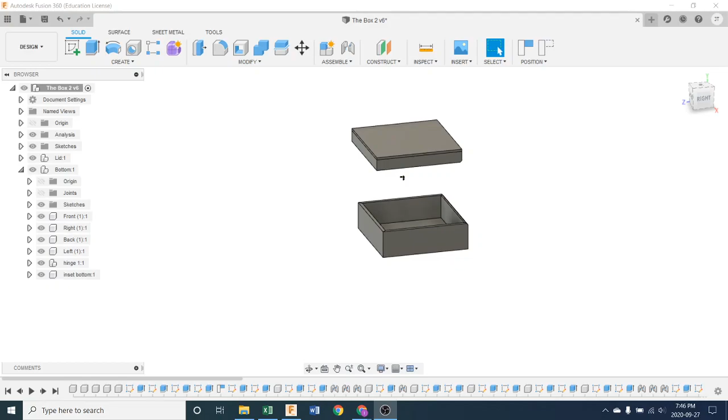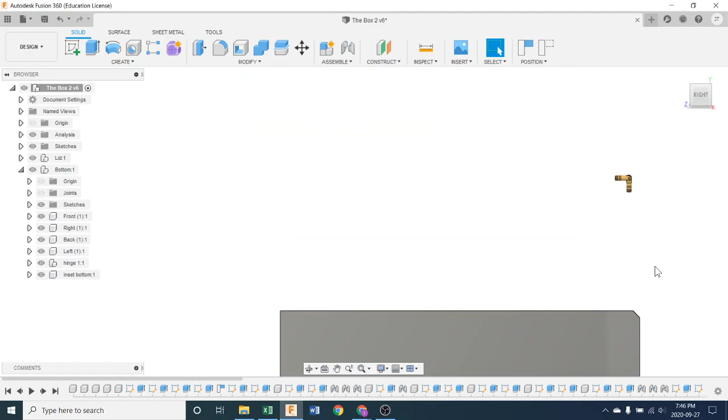So if you followed along so far, you will have brought a hinge in, and we had that on the class. It was already modeled for you and you could just bring it in. It was on the H drive, the shared drive. So just one thing before we start, I'll grab this hinge and bring it over here so we can see it. My hinge is kind of facing in the right direction for what I want.

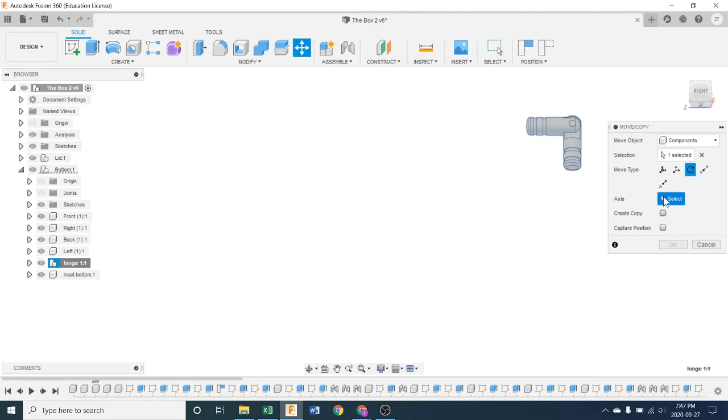If yours was somehow brought in a little differently, you can head over to here where you brought the hinge in and right click on the hinge, then you can move the hinge and select rotate, and pick the axis of rotation, which is what I'm picking now, at the center down here. Then you should be able to grab this little handle and move it around. I'm just going to escape out of that because I don't need to. Mine's kind of pointing the right way. So you can move it that way, probably in 90-degree increments to get it right. I'm sure it's close, but anyway, here we go.

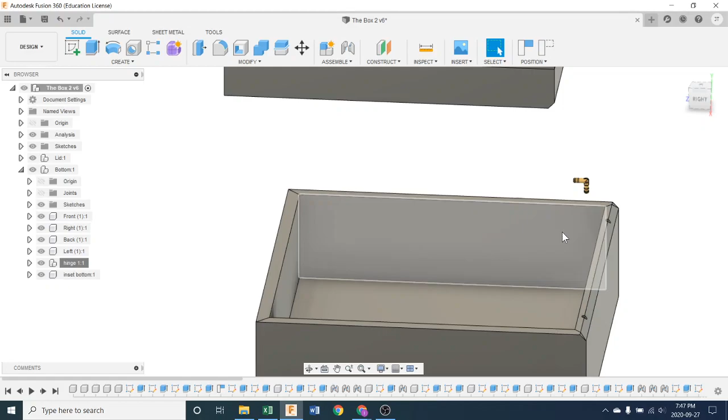So I got my hinge, and I'm going to put it in the hole. So we know how to do that, right? We know how to assemble things. So we're going to assemble a rigid joint. So a joint. Sure, why not. And that joint is going to be the first.

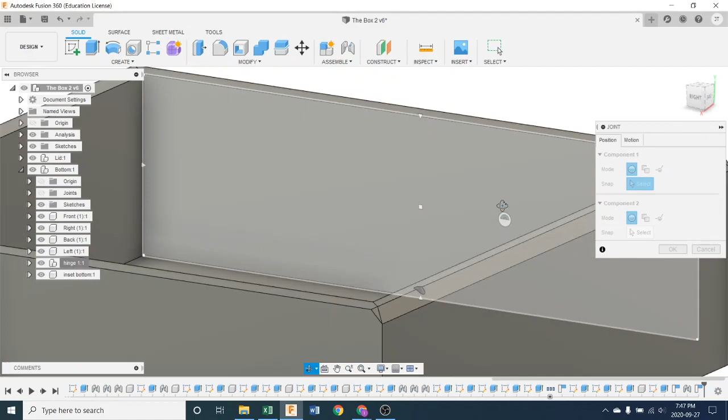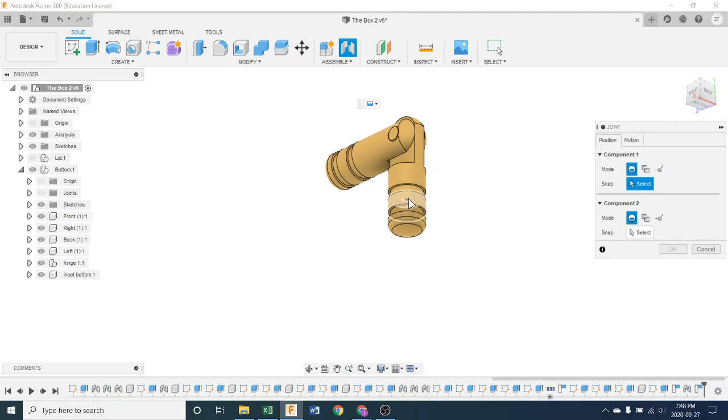I want to move the hinge to the box, so I'm going to go grab the bottom of the hinge. Now, if for some reason things were in your way when you're trying to do this, don't forget you can just switch them off like that. And so that's out of my way, and I just go in here. As I'm picking, notice I've got several centers I can pick from. See that target in the middle? I don't want anything other than the lowest one, so we'll be very careful. We'll pick that. So I got my first pick, and if I got it wrong, I could just X and try again. So there's my first pick.

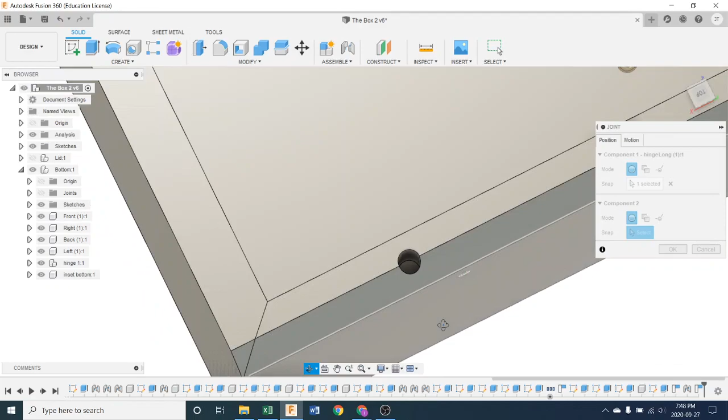I think I got it right. And now, get my box oriented right. I am going to put it way down in the bottom of the hole, which is like this. Click. Now notice it only moved half of the hinge. It does that to save computer power. It's unnecessary math to move the whole thing. So they just move part of it, and the other part will catch up once I accept this.

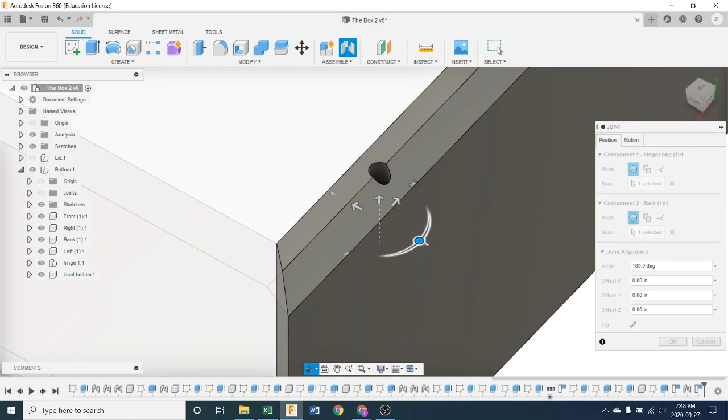Now notice my hinge is pretty far down in there. I must have drilled my hole a little too deep. So what we're going to do is bring this up using the Z axis here. Offset Z, see it's offsetting now, 0.2 inches. We're going to bring it up a little bit just till it sticks out, because what we want, I'll look at the right view, is imagine the other part of the hinge is in here. It's going to be in the middle of the lid, and it needs to be high enough up so that the middle of the lid can clear the bottom part of your box here.

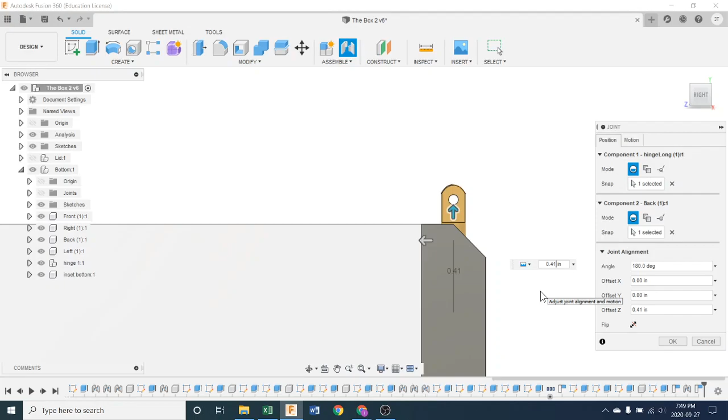So I think it needs to go up even a bit more, but maybe finer now. I'll key it in. Let's go .41. We'll try that and see how it goes. We'll push OK. I can always go back and edit this, so I'm going to push OK for now. There's my hinge, and hopefully the distance from there to there is at least 3/16 of an inch so that they don't collide with each other when we put them together.

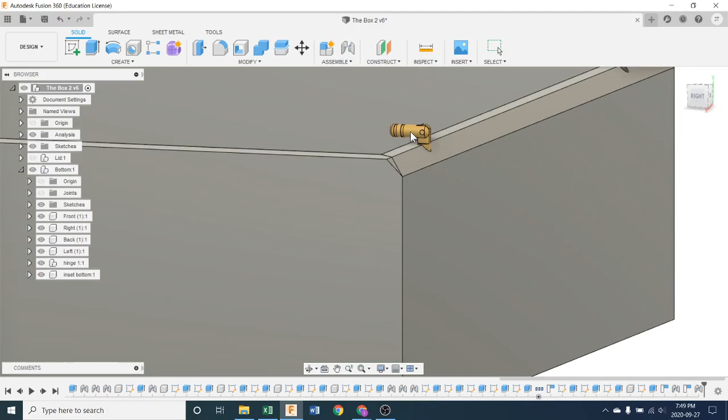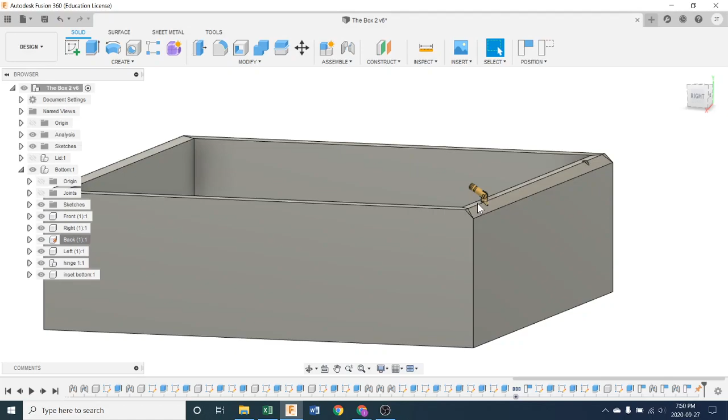Okay, next part. This hinge right now is joined, and if I grab it, I'm just moving the whole box around. It would be nice if it operated the way it's supposed to. Well, the way to get that to happen is the back here, the back of my box. I'm going to right click on it, and I am going to ground that, and capture position, sure. Now this part here doesn't move anymore. I can click and hold, but it's grounded. It's like stuck to earth, so it doesn't move. But now the hinge, since this part of the hinge is grounded and doesn't move, this part can start to rotate. And that's pretty cool to be able to do that.

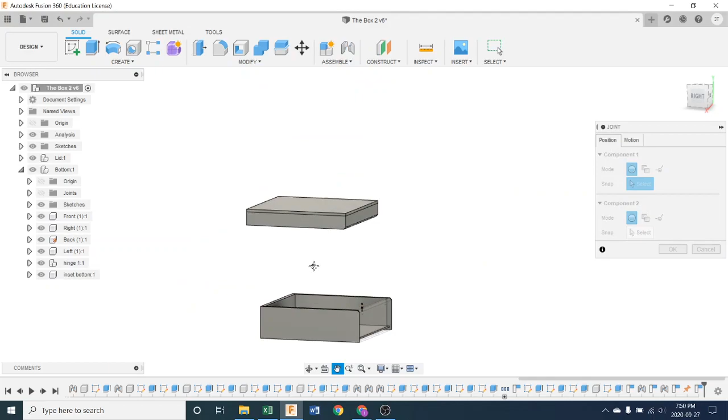So I'm going to put it all the way up just to make it easy on myself for the next move. Okay, next move. We are going to assemble a joint, and bring capture position, and we're going to turn the lid on, and we are going to go find that lid and the appropriate hole, and we're going to pick that as our first.

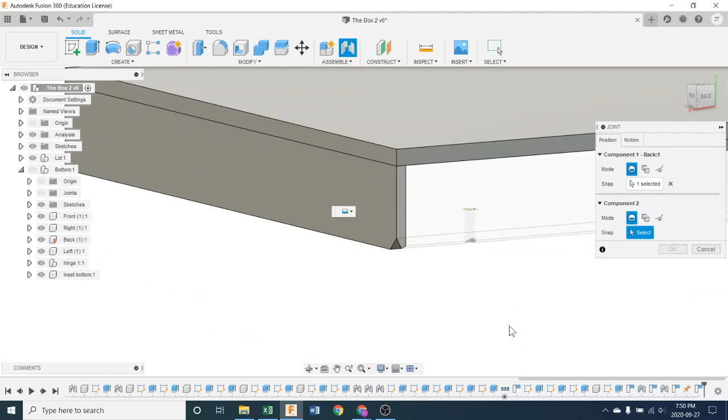Now see the bottom coming up? If the bottom's in your way, don't forget you can switch it off for the moment, go in and find what you need for that. So I got my first one. So now what I have to do is turn the bottom back on, because that contains my hinge.

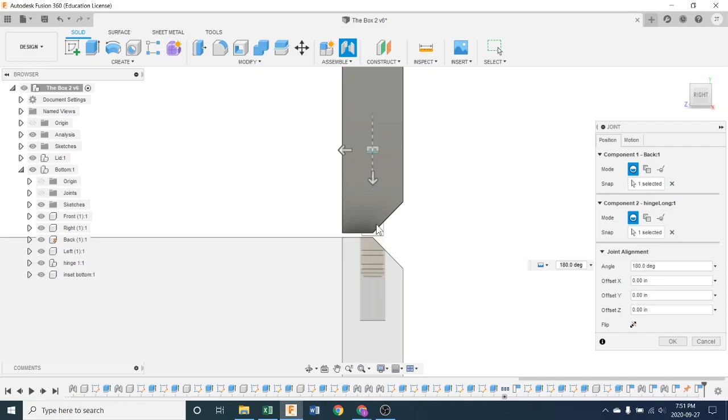Now we'll zoom in and find the top edge of the hinge. There we go, and they're going to come together. Remember, the whole thing's not coming together, just part of it to show me, see if I like it. I'm going to look at it from the right, and zoom in. And look, I do have, just the way it is now, this little gap that I think for now is pretty good.

This will be enough gap to allow the hinge to operate, so I'm going to push OK. And now let's see if it works. Oop. And now the hinge doesn't quite work. So we have to go figure out, oh wait a minute, it does work, but it's not quite right. And that's because when I modeled the hinge, I just chose like 90 degrees of movement, and apparently that's this 90 degrees.

So now we have to fix that. So I'm going to go into my hinge where I found it. Notice I'm only working with one right now. If you have two, in a moment I'm going to ask you to delete the other one, and we're going to copy this one. But anyway, we have just one.

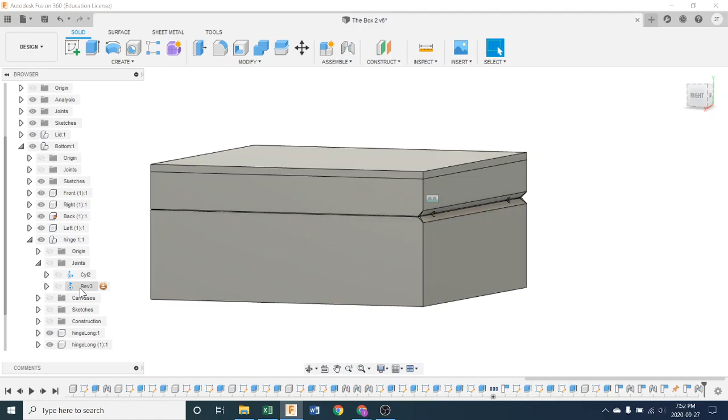I'm going to go into it here, expand it. There we go. And I'm going to look down here for joints. There we go, expand that. And this one's the revolution or revolute joint. I'm going to double click that.

And now if I look at it in right view, I can see that I have a flag vertical and I have a flag here. And that's kind of representing the motion that I have right now. Well, if I move those flags around in relation to each other, it looks kind of funny right now. But if I do this...

And I push animate, see the hinge does not do quite what I want. So let's go back and do it this way. Hit stop the animation. Let's go this way. And let's go like that.

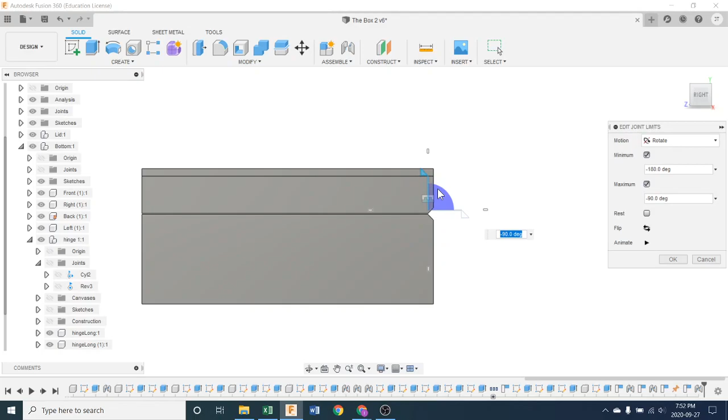So we're looking for 90 degrees. Push OK. See what we got now? Oh, that's not good at all, is it? Okay, one more try. And we're going to put this right back to here.

And we're going to bring this one back down to here. And I think it was, if I recall, I wanted this to be at 0 and this to be at 90. There we go, let's try that.

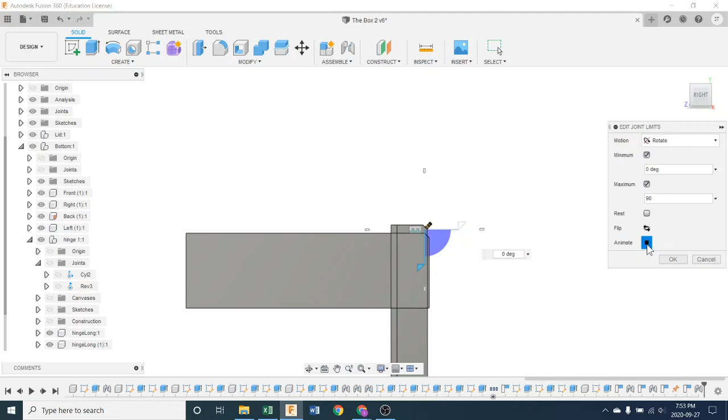Okay, when I do that, aha, I got it. Now that's what I mean about this tutorial being a little tricky. There's a few moves in here that can be very frustrating, especially since you guys didn't build the hinge yourself from scratch in your drawings. You're kind of bringing one in, so you have to adjust that revolution there. But give it a try.

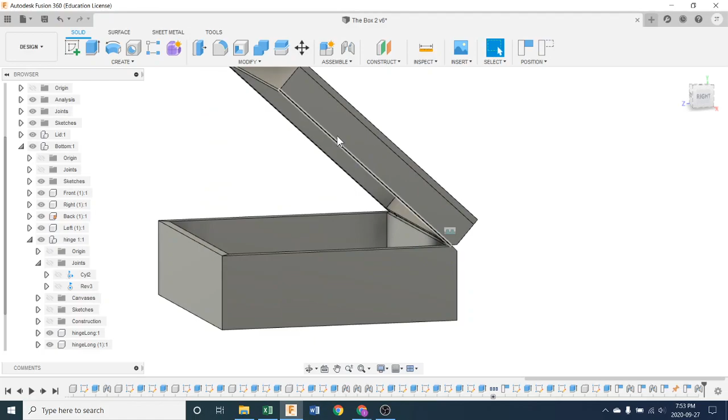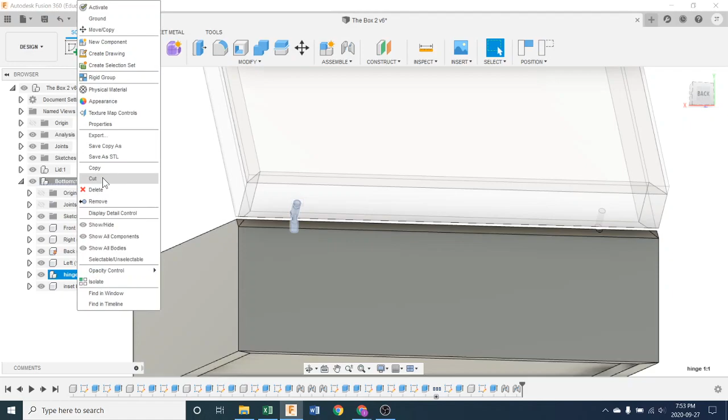Now the next thing, you can leave it like this. You don't need to have two hinges in the box, but obviously to complete this, it would be nice to have two. So to get the other one in, what you're going to do is right click on hinge while you've got bottom selected here as active. Right click on hinge, copy it, and then of course paste new.

So we have another hinge come in. There it is. And you can move it around if you want, but we'll just push capture position OK. And oh, I'll grab it now. It's apparently, I should have moved it. Now it's sitting right on top of the other hinge. Fantastic. So now I got to go in there and grab it.

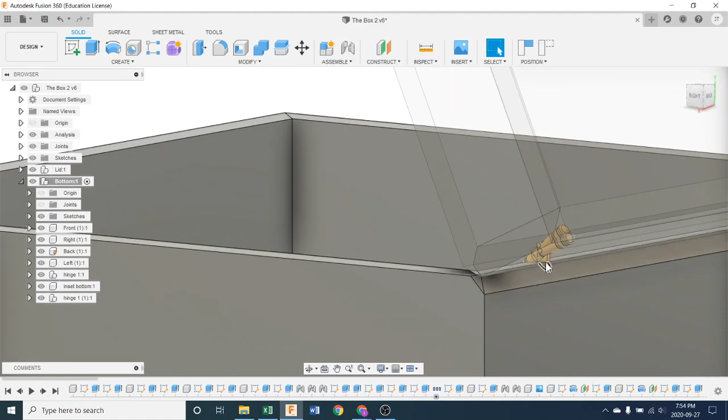I guess it's this one. There we go, and bring it out here. There. Okay, so now I'm going to stick that one in just like before, but this one's a little trickier because I've got things in the way.

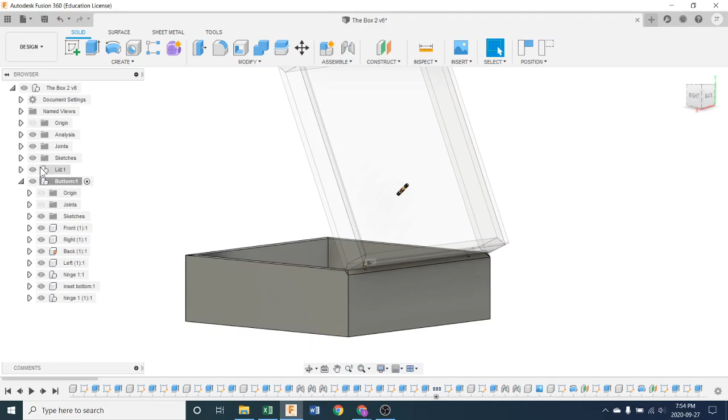So the first thing I'm going to do is stick the hinge in the bottom of the box. I'm going to turn off the lid. I'm going to assemble a joint. Yep, and we're going to zoom in and grab this part.

Oh, I'm going to have to check again. I think I missed it. There we go, come on. Boom, got it. I'm going to go stick that in the bottom of the box.

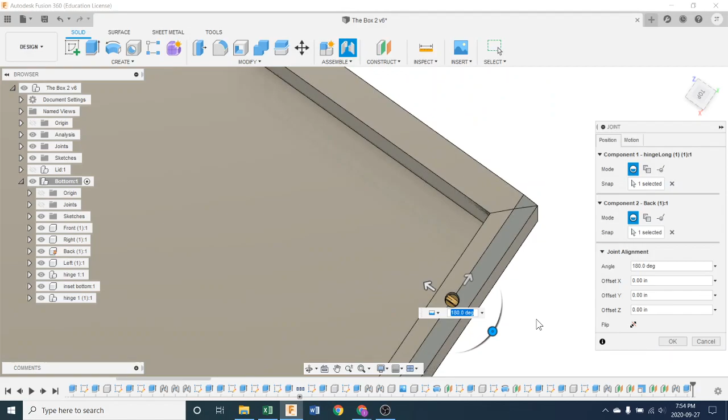See if I can do this quickly. So when you're watching, you're probably tired of watching. Oh, I can't remember how high up I went. I think it was 4.42 or something like that when I was raising this up.

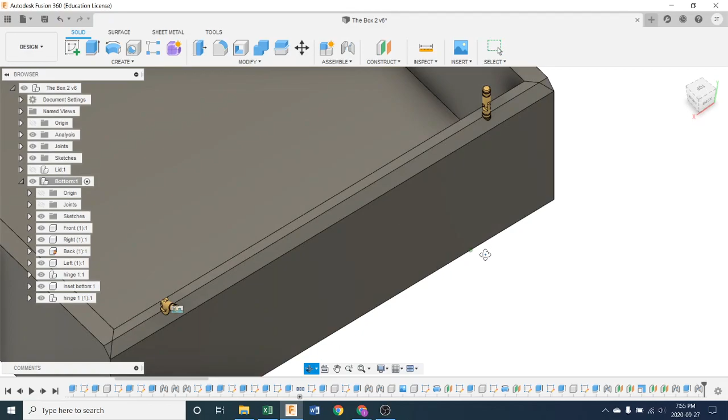4.2, this kind of matters. And this is where it gets tricky. If your two hinges are in disagreement with each other, your lid will freeze, it won't work. So we're going to have to get them doing exactly the same thing. Now the revolutions should be the same because we copied and pasted. The only thing that we might have is different heights and different points of rigid assembly.

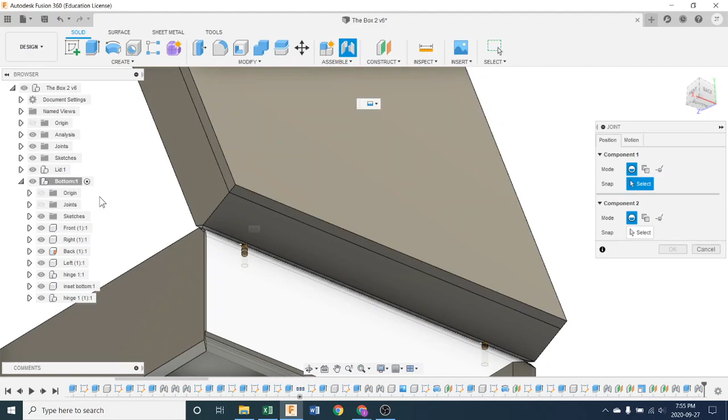So let's try our last bit here, which is turn the lid back on, assemble a joint, head up to the lid. Now we have to turn the bottom off to do this because I have to go find that hole in the lid. So now I'll go in there and grab the hole, if I can. Get this to roll around again. There we go. Find the center of the bottom like that. That's the first part.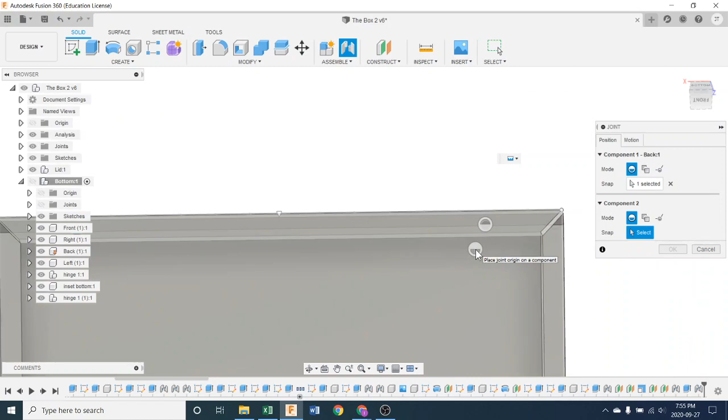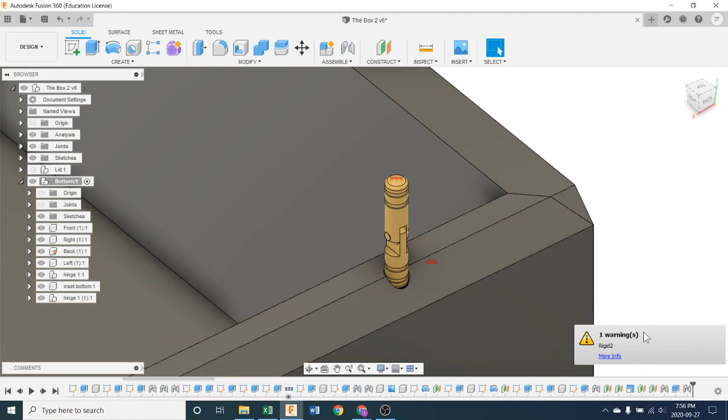And now I got to go indicate the second part that that's supposed to attach to. So I'll turn the bottom back on, and we'll turn the lid off this time because I want to be able to get to that. And we'll go in and grab this part here. Oh, not that part. There. Okay, and oh, I got a warning already, so that means I probably have broken this.

Let's see what happens. Turn the lid back on. Oh, maybe the warning was just the component you're using is... Okay, so this is what I was afraid of. Something is disagreeing, and I'm going to have to spend a little time to figure out which one. It might have been where I made my rigid joints here, but you can see the joints are all red. They're very unhappy with each other.

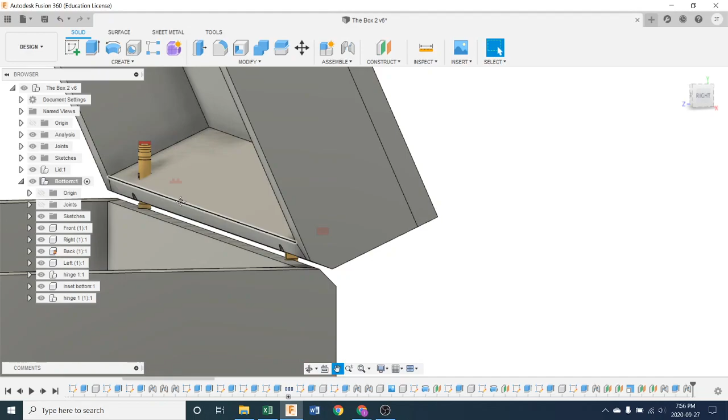So when that happens, the lid still works. Let's go out here for a second and hit escape and go top level so we can see it all. The lid still works, or it should still work. Hang on. Oh, okay, maybe it doesn't. Okay, so I've really broken it.

So the last thing I can do is undo the joint that I just made, which is up under here probably. Not those ones. Underneath hinge maybe. Not those ones, those are my hinge joints. So it must be up top level. I wasn't following as I was doing it. It's got to be that one, yeah. I can undo that. Delete.

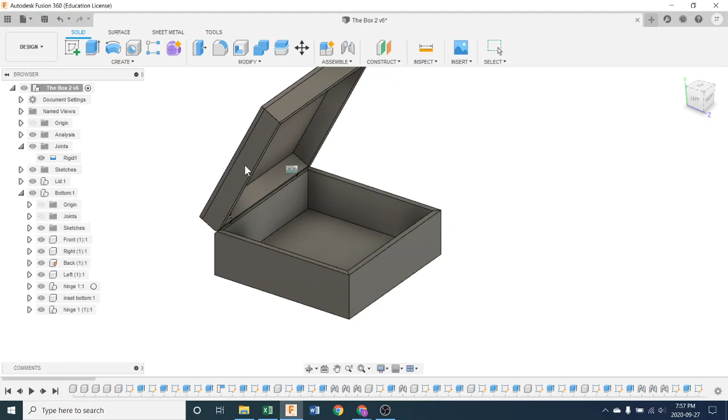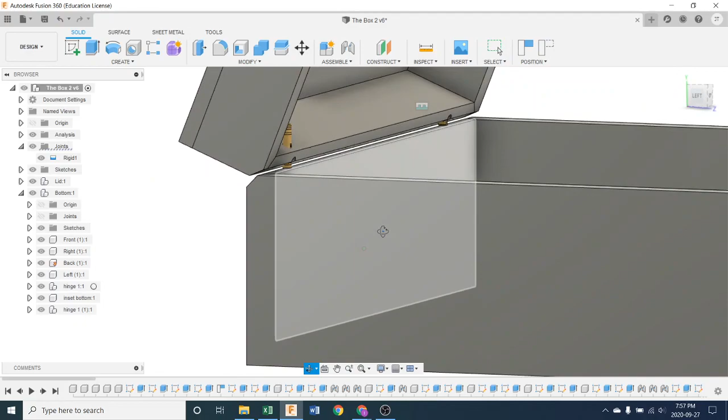There we go. And now the box works, and the hinge is in there, but you can see it's kind of broken. It will take a little bit of fiddle farting around. Let me go see what this looks like. Edit the joint. It was an offset of, oh, I don't know. Maybe I shouldn't have offset it last time I did it. Maybe it's right because I copied it. I'm not sure.

But anyway, I'm not going to spend a bunch of time in here. I would probably just fart around with it for a few minutes and probably get it. But in the end, it does the same thing. So there's our hinge in our box. Oh, I can see the problem now. Can you see this one here? The hinge is, there's the edge of it right there.

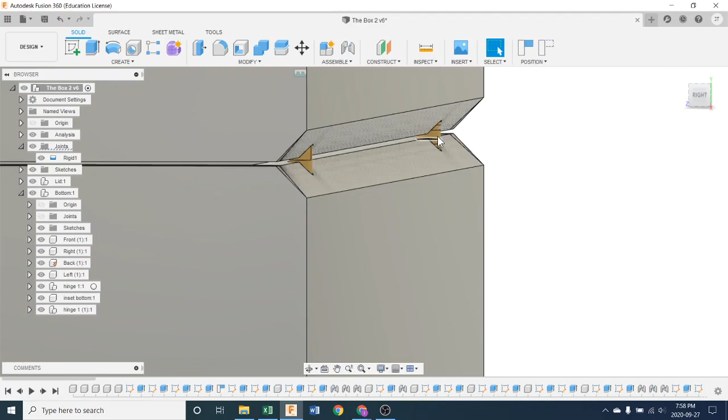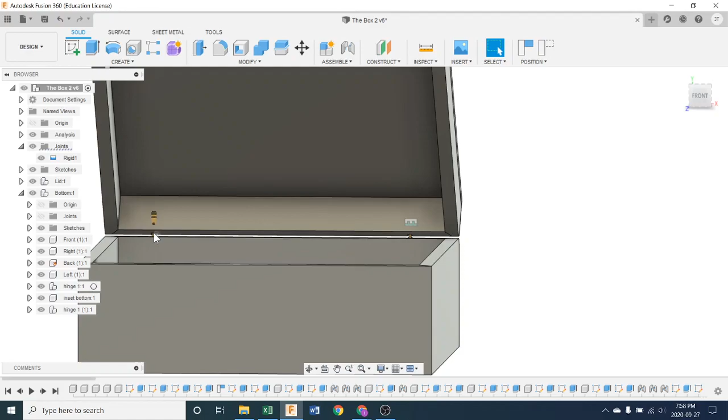You can see it'll highlight it. And this one over here is at a totally different height. So whatever height that is, is wrong. They have to be exactly the same height, otherwise they won't operate in unison and the lid won't open. So that's it. If you get that far, at least you have a box with a lid that opens, and you can try and get your two hinges to be exactly the same height, offsetting your rigid joints.

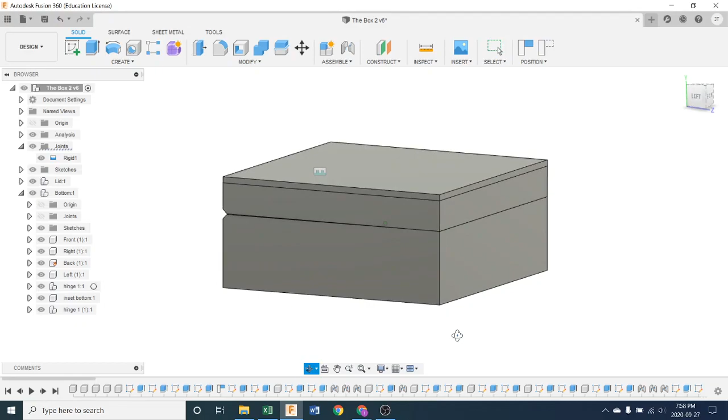That's it for now. Hope you managed to get through that. It's a little bit of a trickier one, and pretty much you got your box now. The next thing will be drawing some plans. I can also show you how to put the splines in if you want. It is kind of more of an advanced move, and I'm not expecting that at this point as far as putting in the splines and finishing the box.

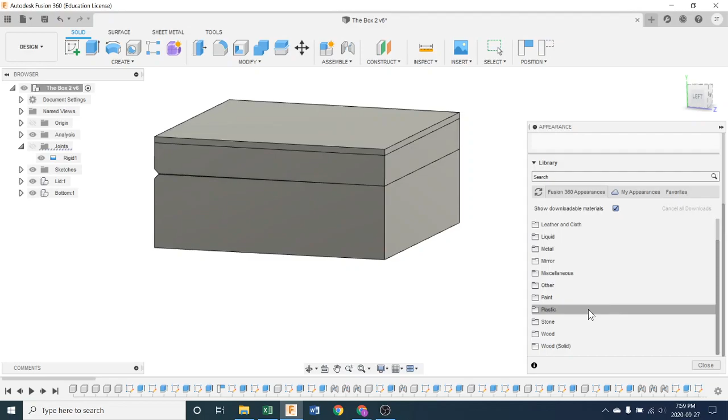Oh, and then the last thing is, if you want to make it look like a box, I'll turn off the joints here for a second. All you have to do is go up under Modify, head down to Appearance, pulls up an appearance menu. Make sure you're on bodies and components up here selected. Head down to wood. Well, I'm assuming you want to make it look like wood. Choose a wood, drag it over, and look, it's starting to look like wood. And there we go.

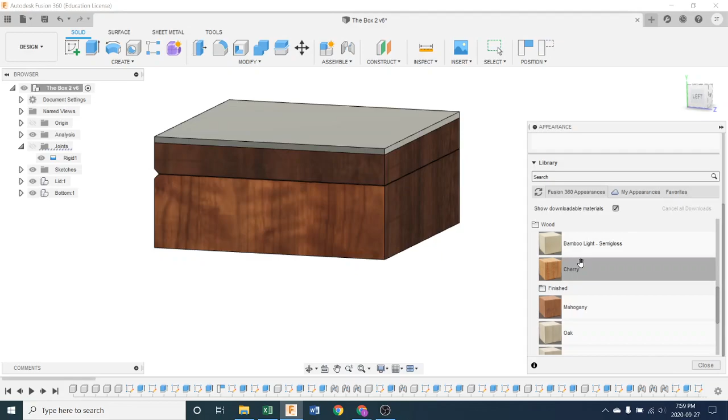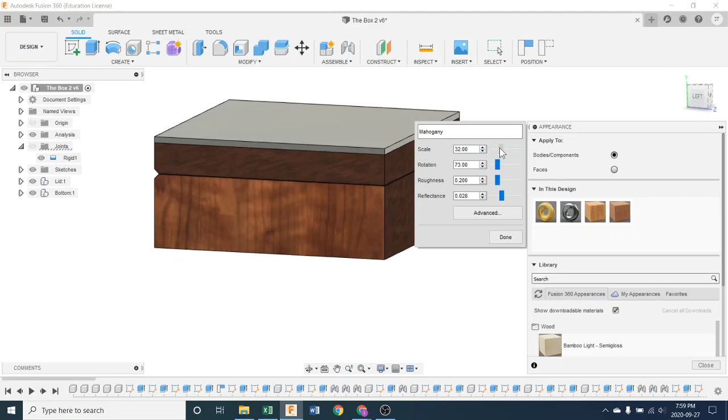There is a way to rotate the grain. If you call me over, I can show you, because this grain is kind of going the wrong direction. And well, actually I'll do it right now. You just double click on this and you can get these details. This is the cherry that I chose, or was it mahogany? Oh, mahogany, there it is. And then what you can do is you can rotate this way, right, and get it to go in the right direction. You can also change the scale so that the grain's not so big, whatever you think looks good, to give it a representation of what you think it should be.

So okay, that is all. Make your box look like a box, make your lid work, and then it's time to make some plans.